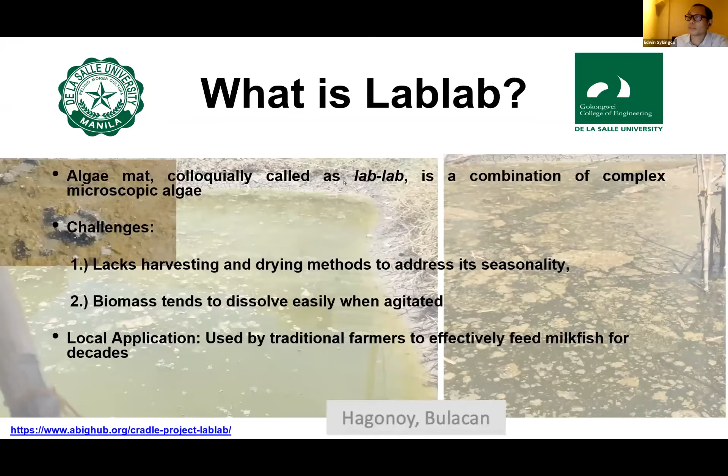First, it lacks harvesting and drying methods to address its seasonality. Second, its biomass tends to dissolve easily when agitated. And locally, it is usually used by traditional farmers to feed milkfish. And our industry collaborator, Sante, a company that produces aqua feeds, recognizes the challenges in harvesting LabLab, which became an opportunity for us to develop several methods of harvesting and drying LabLab.

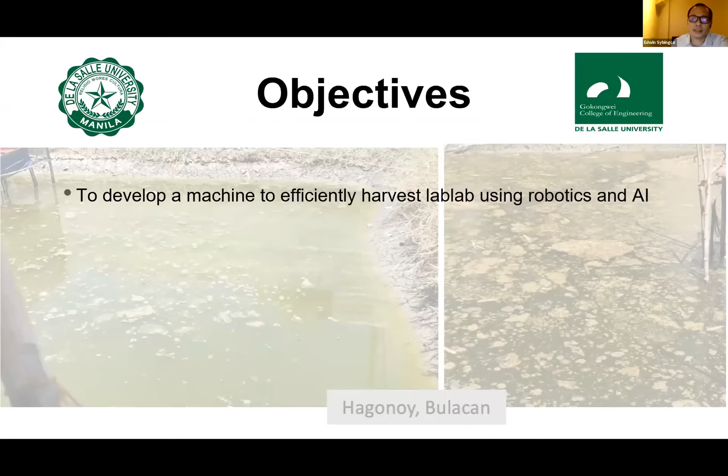Now, from the challenges mentioned, we identified the following objectives for this project. First, to develop a machine to efficiently harvest LabLab using robotics and artificial intelligence. Second, we want to encourage other LabLab researchers to further improve our proposed harvester, as this is the first and only successful automated harvester of LabLab in the country. And finally, most importantly, to increase the sustainability of the pond and the cultivated LabLab.

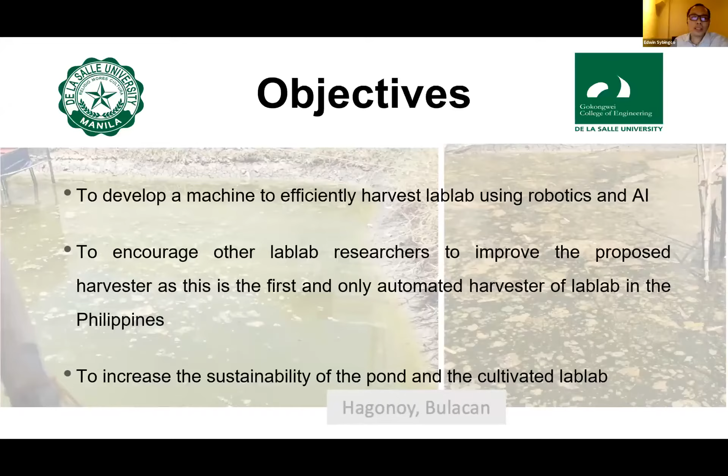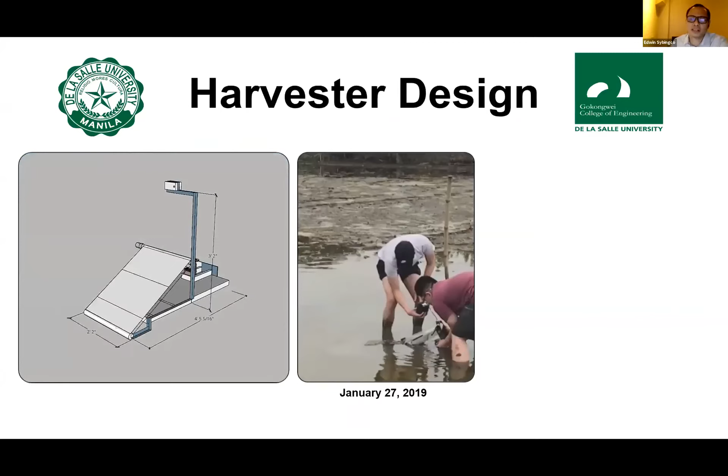Now, here is the design of the surface vehicle with the following dimensions: around 26 inches wide, 53 inches length, 38 inches height. The harvester is around 13 inches height from the water. Shown on the right is the efficient and effective harvesting mechanism installed on the surface vehicle.

We use the 125 micron wire mesh as the floor mat of the conveyor system and the DC geared motor to move the conveyor system. We have experimentally verified that by using the combination of 125 micron wire mesh and the DC motor, we are able to collect the LabLab successfully from the water, as shown in this video. This experiment was conducted last January 27, 2019.

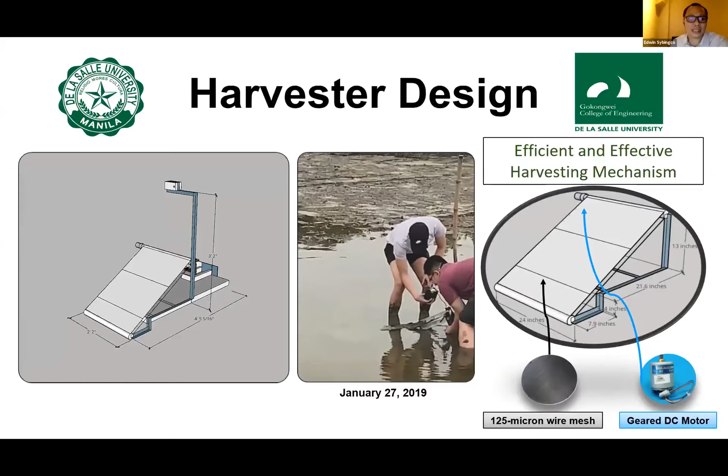Now, after the design was completed, the surface vehicle was implemented as shown. So this is now the actual surface vehicle with the harvester. Of course, initial testing was conducted in the swimming pool, as shown in this video.

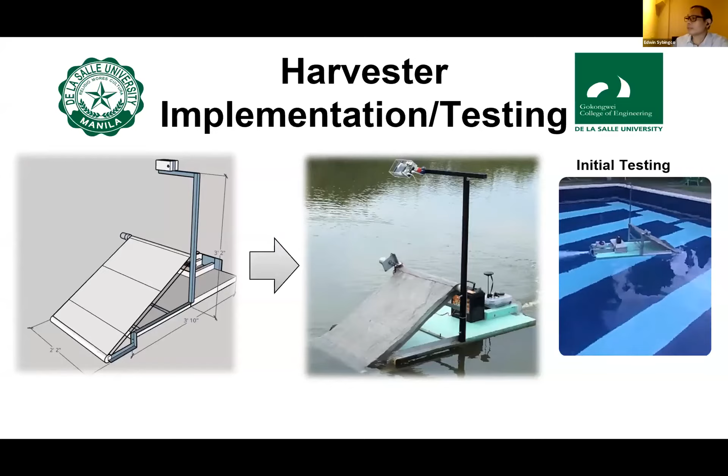Now, the controller used to move the vehicle is the Pixhawk. We usually use Pixhawk in our drone projects, but in this project, we have implemented it in the surface vehicle. The controller has two communication links: the remote controller receiver that is used to communicate with the remote controller, and of course, the telemetry to communicate with the ground stations.

From the telemetry, we are able to monitor the battery status of the surface vehicle, the GPS locations, the roll, pitch, yaw from the internal IMU of the Pixhawk. Connected to the controller are the brushless DC motor and the servo motor to control the dynamics of the surface vehicle.

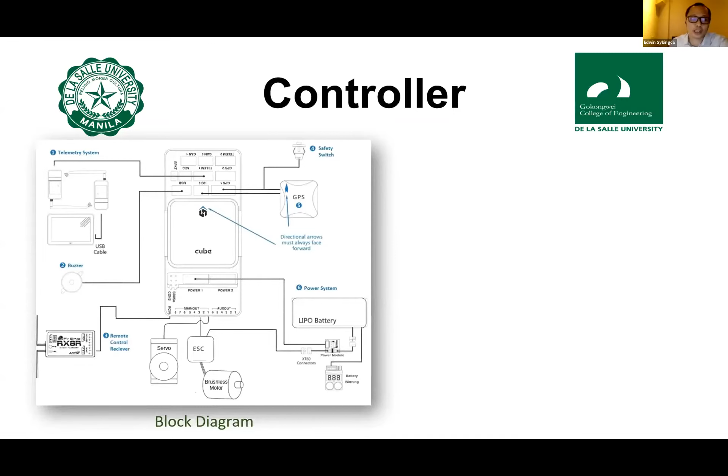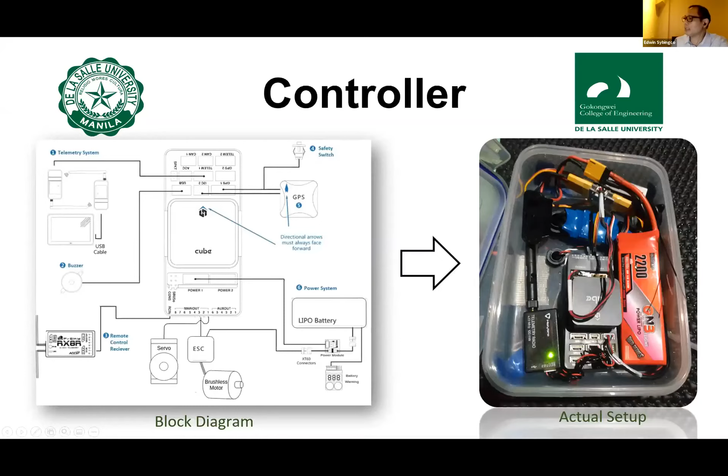Now, between the Pixhawk and the brushless motor, we have the ESC, which is the electronic speed controller. Shown on the right is the actual implementation. You can see the Pixhawk, the telemetry, the battery, and of course, some connections.

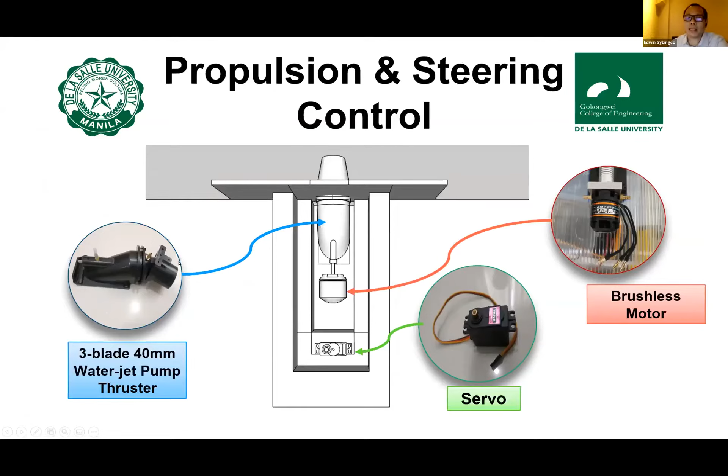Now, shown in this slide is the propulsion and steering control. The steering is controlled using the servo, while the propulsion is controlled using the brushless motor connected to the 3-blade 40mm water jet pump thruster.

Now, there are two modes of operation. Mode 1 is the remote control, and the driver uses this remote control to maneuver the surface vehicle. While mode 2 is the autonomous. In the autonomous mode, we use the mission planner to define the mission through the so-called waypoints.

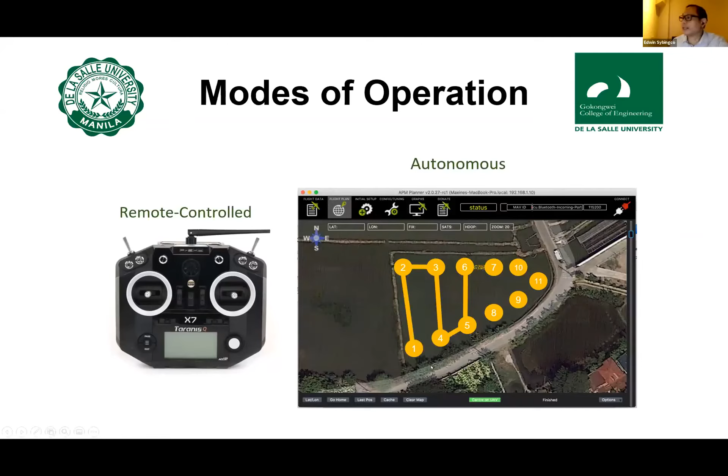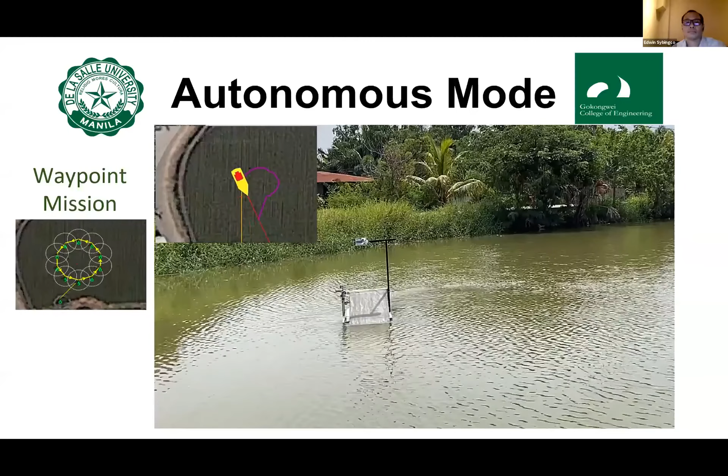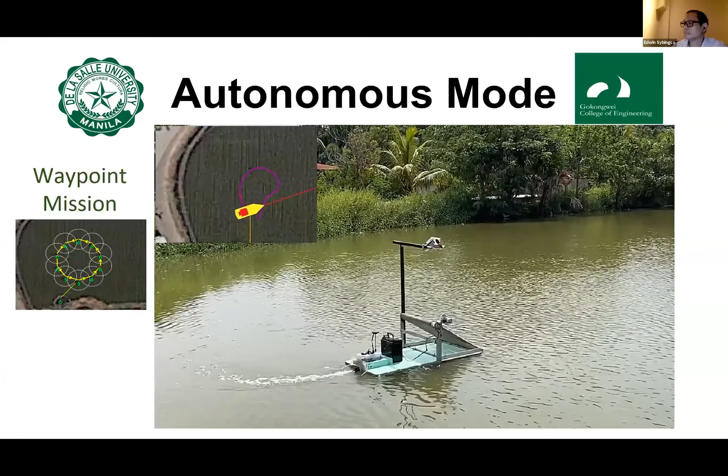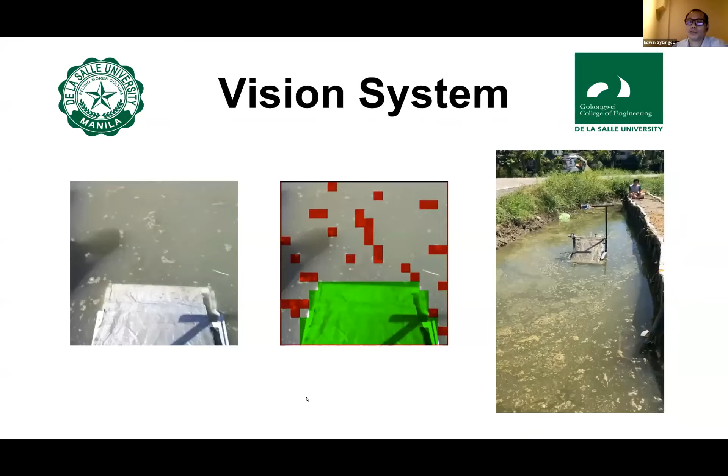The surface vehicle is also powered by a vision system. The vision system is used to detect the presence and concentrations of the LabLab as it moves. As of now, the vision system is used to assist the driver in navigating the surface vehicle. But of course, in the future, we plan.

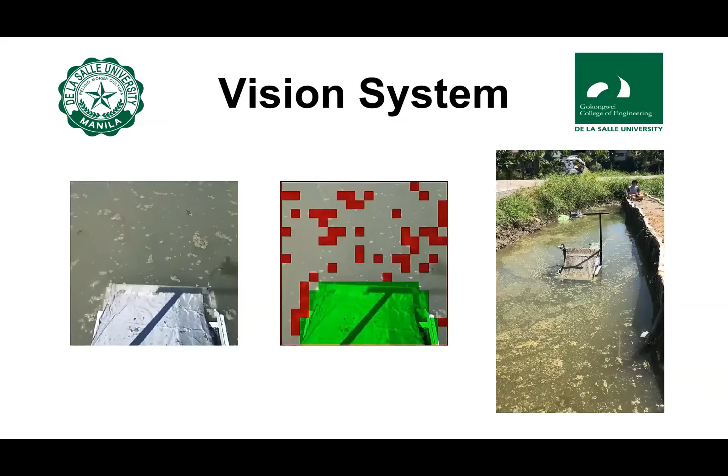Edwin, we lost your sound. Edwin? Can you hear me now? Okay, you're back. Okay. So let me go back to my presentation. Sorry about that for the technical issue. So anyway, I think you weren't able to listen to this slide, right?

So the surface vehicle, as mentioned earlier, is also powered by a vision system. The vision system is used to detect the presence and concentrations of the LabLab as it moves. And as of now, the vision system is used to assist the driver in navigating the surface vehicle.

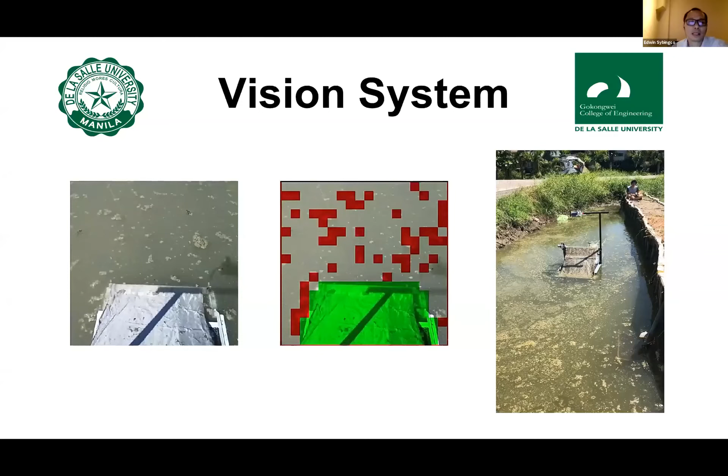We lost you again, Edwin.

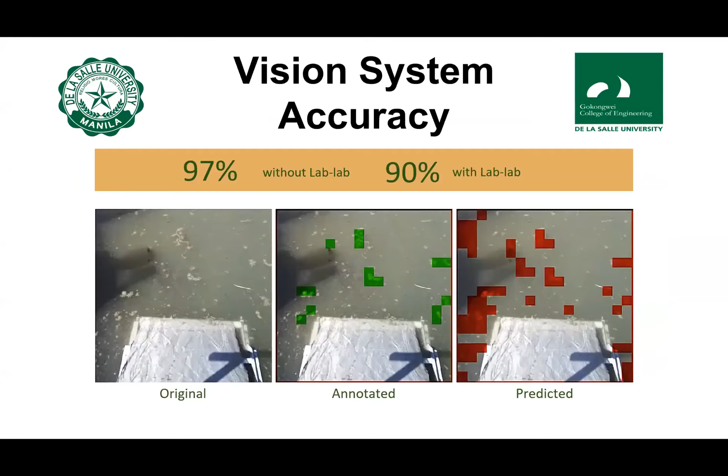We cannot hear you anymore, Edwin. Sorry. Okay, can you hear me now? Okay. You're back. I'm back. Okay, so I think it's because of the video material. It's eating up all the bandwidth. So anyway,

as mentioned earlier, we did the testing. The left video shows the original video, and the middle one is the annotated version, essentially to get the ground truth of the presence of the LabLab, and the right video shows you the detected LabLab. We use deep learning to detect the presence of LabLab. And the accuracy we got is 97% without LabLab and 90% with LabLab.

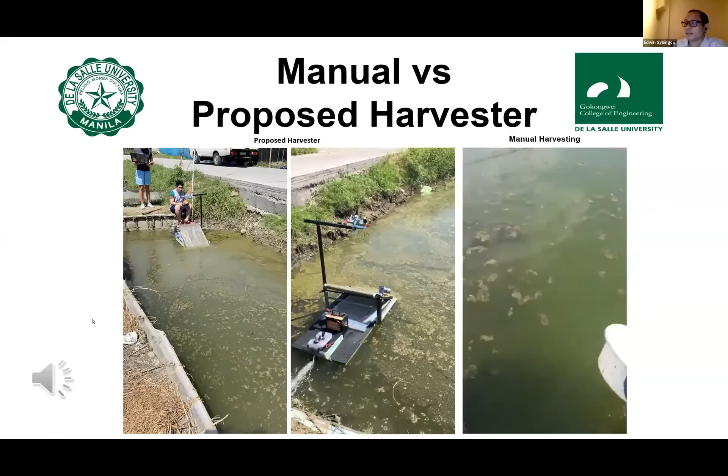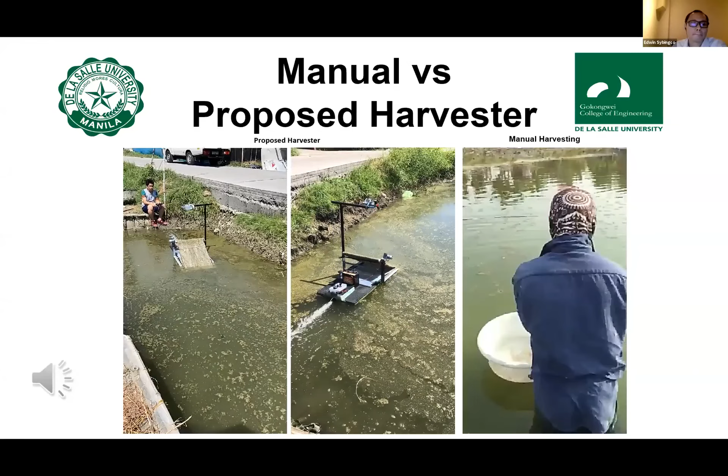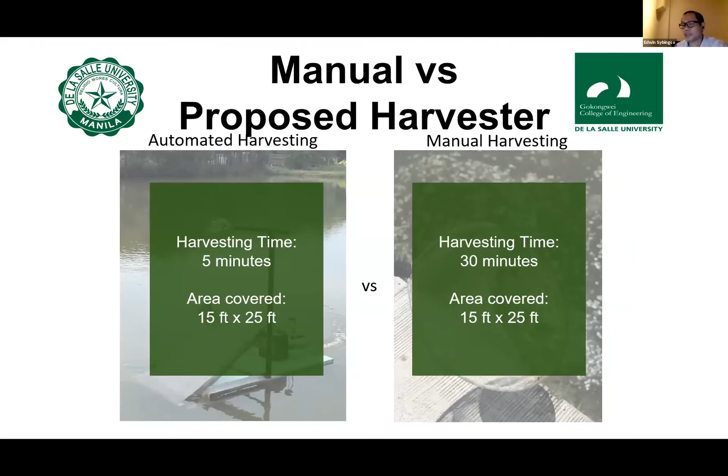Okay, so this is essentially the video that compares the proposed harvester and the manual harvesting. Okay, so to quantify the comparison, the proposed method is able to complete the harvesting in 5 minutes in a 15 feet by 25 feet pond, while the manual harvesting was able to finish it in 30 minutes.